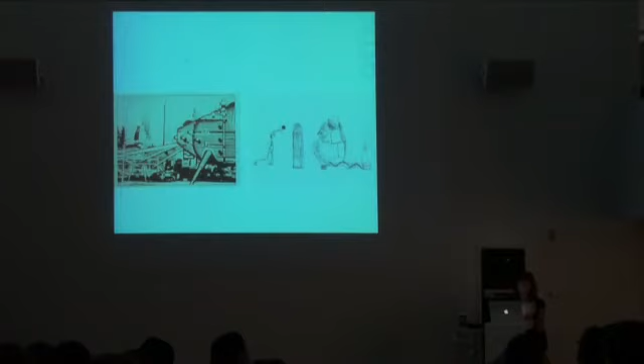So I'm showing you just a few images that I find inspirational, things that I look at outside of buildings—certainly Wally Byam's Airstream and the small, compact hotel rooms of Japan, making do with very little. The work of someone like Lucy Orta or Dré Wapenaar: these beautiful tent-like structures, very simple, elegant teardrops, kind of just hanging almost seamlessly.

And this image, which actually now seems very archaic to me, but was something that I started using in my lecture about 10 years ago, pretty much sums up my world, my office, my on-the-road experience—the laptop and the iPod are ideas that I think haven't quite been implemented into the architectural vocabulary.

Eventually, I feel that this Razorfish image is a quintessential image, in that everything will eventually be so small and so embedded that the idea of shelter might dissipate, or might be found in a completely different way.

New advancements in technologies found mainly in the automobile industry and the aerospace industry are starting to find themselves into the classroom or into production lines, but again, haven't quite made it that far.

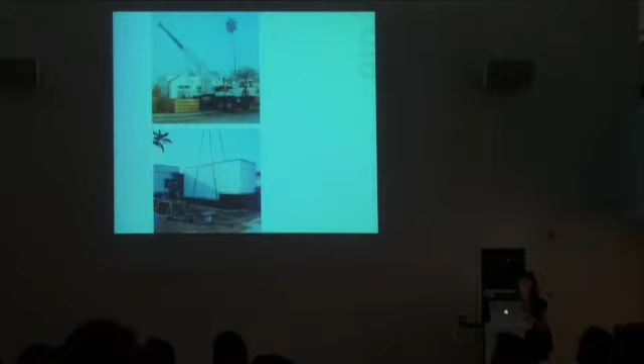So this is my house. I'm a big believer in trying out what I spout off about. This is an early morning in Venice, California. This is a crane that's trucked or craned over the top of the house—a truck trailer. Very inexpensive addition, I think I spent about $2,300 on this structure. I use this as a kind of ancillary space to the garden, an easy exchange of interior and exterior space.

One of my very first projects done with students, also at Woodbury, was the transformation of a truck into something we called the Eco Lab. This was an experiment for all of us in terms of compact spaciousness and what you could actually do with an 8-foot wide modular unit using found recycled elements, handcrafted, all built by the students, turned into a mobile classroom that teaches children about the life of a tree and moves throughout Hollywood. It was a very successful project for us because it led us to a lot of other ideas.

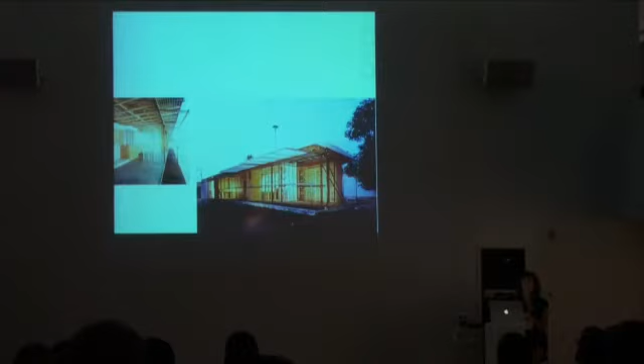This one in particular was another project done with a fellow architect in Santa Monica, Larry Scarpa, where we started to look at manufactured housing. We were given this old trailer, took it apart, and started to realize how shoddily crafted these things are—replacing some of the walls with steel and allowing it to be completely open to the elements. This is used by a group of people that train people in construction. So they're simple ideas, simple projects, but they got me started on my path and allowed me to understand more about what it was that I was grappling with.

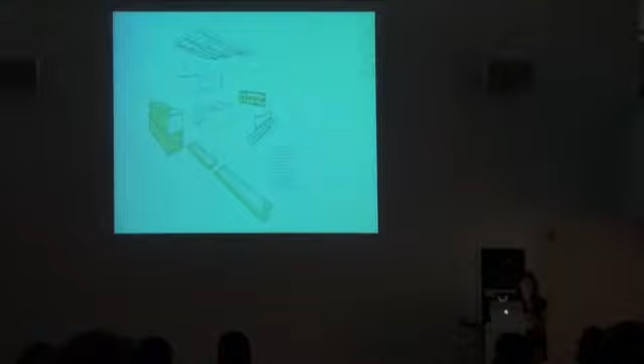The idea of shipping containers fits naturally into this envelope. I lived for about 5 years in downtown Los Angeles in a very industrial area called the Brewery, an artist loft complex. The fellow who owned that property was also a hoarder of materials and junk. He offered me the opportunity to create a house for him with all of the elements found on this property. So I picked out 4 shipping containers and 2 grain trailers and a bunch of other items, making a sort of modest structure on a fairly big piece of property in LA, about 10,000 square feet. So the containers really just acted as these buffers, as these walls.

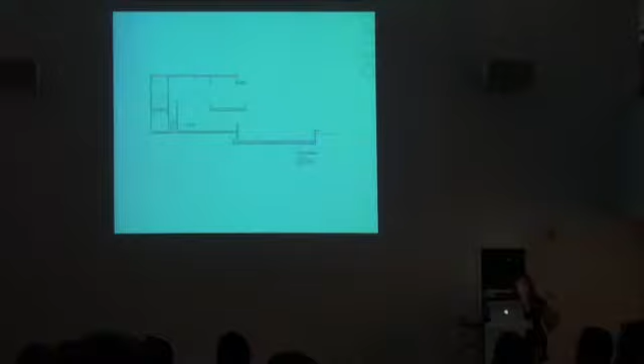And this is really just a house for one person, about 3,000 square feet. In section, you can see that the grain trailers became 2 koi fish ponds—one was on the inside, one was on the outside of the house—and sort of united the water feature between the two.

Here's the location. This is the 5 freeway running north and south. This is the Brewery complex—about 350 artists live and work, and manufacturers live and work in this area. Downtown's over here, and SciArc is kind of over here right now. He also, being a true Angelino, doesn't walk to work—so even though he lives here and his office is here, he drives. So it was really important for him to have the house nestled in the back of the property, which would give him that natural experience of walking across the property to his car.

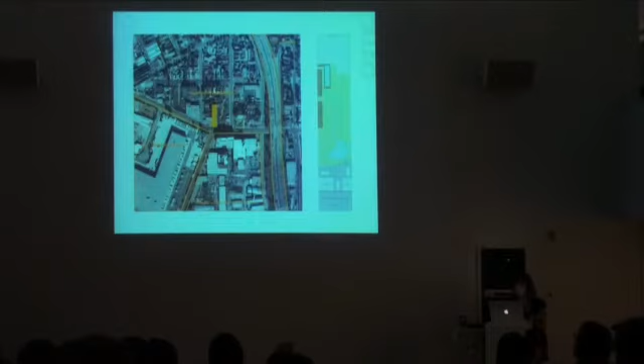So this is the site, and this is where the materials came from. The entire landscape was actually introduced as well, but because this is part of the alluvial plain of the Los Angeles River, once we removed the tarmac and concrete and planted, it was incredible what the wildlife did, almost instantaneously—the birds that come and the butterflies that migrate through. So the space is alive, it sort of breathes.

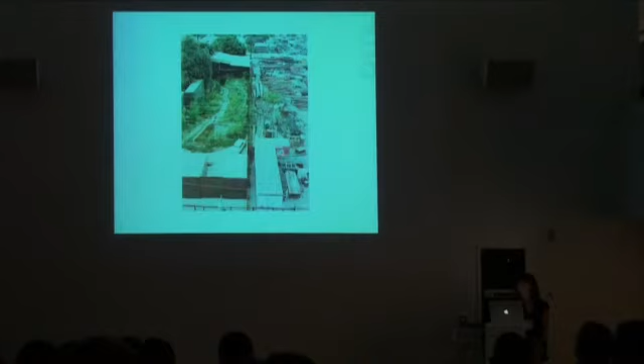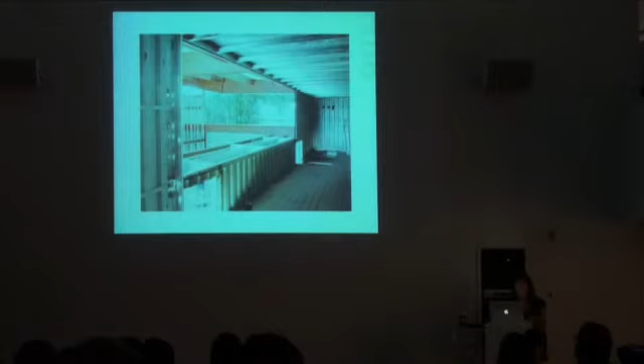There are 4 different kinds of containers. 2 are steel, 2 are aluminum. There was a lot of invention. This was probably the most collaborative project I've ever worked on for a client, because he was very involved in it.

His first house was completed with Michael Rotondi, and I think they took about 5 years to do that together. This house was completed in about 3 months, so it was a very different process, and we were both very much involved in it.

The house has a sort of natural breathing ability because of the way in which the windows are set, and you're able to move air through it passively. The roof is built up from a series of rigid insulation and decking, so that air will travel through this entire roof, and you hear it sometimes with the wind passing by.

There's probably a total of 5 people that constructed this house: steel, glass, drywall, and an artist. And here's the client. There was an interesting relationship between this fellow, David McCarskey, and the client, Richard Carlson, because they knew each other for so long, and everyone who worked on this project also lived within this complex. David McCarskey designed all of the furniture, and there was an artist who installed all of his artwork, so there was always a kind of knowing about what all of the elements would be in the end, even though we weren't really sure how they would fit together.

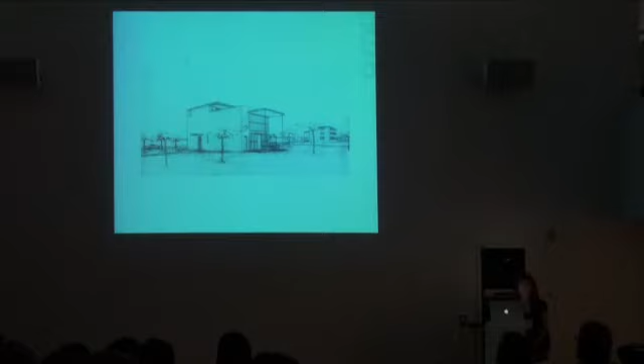So I can't say that I haven't looked at history. People that came before, predecessors, are important for all of us, I think, and it's important to know where you position yourself. From the 1920s, Corbusier was starting to think about prefabrication. Certainly Conrad Wachsmann and Walter Gropius were already way ahead of things in the late 40s.

This is from '46. This is something called the packaged house, where they were looking at panelized systems. They actually had a whole truck line that they invented that went along with that system, because it was done in meters—it was a metric system.

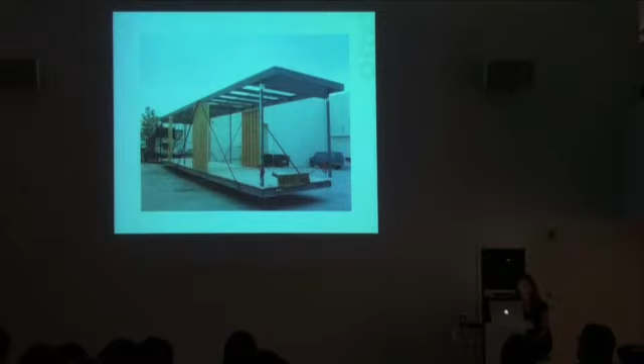It sits on its own set of axles and wheels. Those axles and wheels get popped off when they arrive on the site, but the entire building stays as one unit. The maximum width you can move a single unit down the road in California is about 16 feet, and you can go up to approximately 80 feet in length, with a height limit of about 15.6 feet.

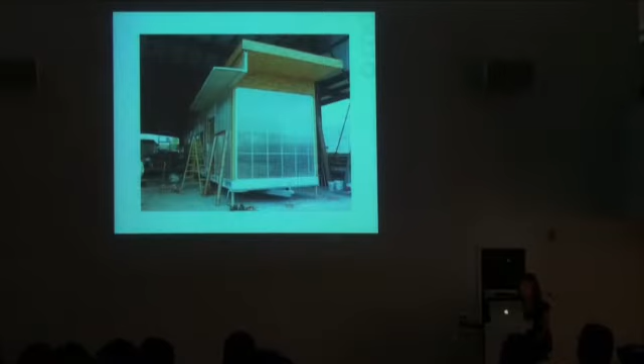So this little unit was an idea that I had, and I thought if I could just produce one thing, then I could satisfy my interests in this. I was able to cobble together a series of local fabricators, local business people that would contribute to that, from the flooring, which was bamboo and coconut palm flooring.

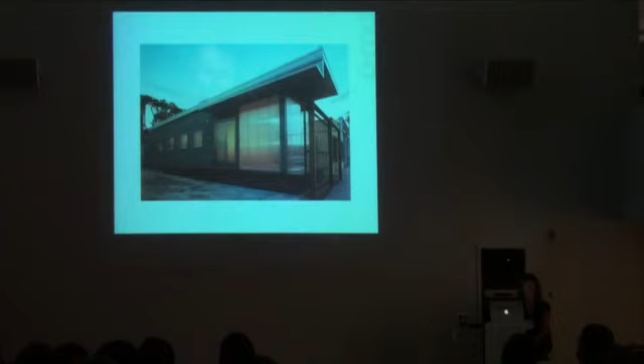There's a whole series of different technologies embedded within this house. I use this, it's right down the street from my office, to show people what the potential of just a single module or modular building might feel like. It's very spacious on the inside, very different in volume from the outside.

This is a polycarbonate front panel. It's a shed roof, so at its highest level it has an operable skylight, a very simple idea that allows it to be passively cooled. And then there are heating panels in the ceiling called people heaters that give it its heat in the winter.

From that project, clients started walking in the door, and we started to explore a variety of different building types, still on smaller lots. This is a lot in Santa Monica, very small, about 24 feet wide by about 125 feet long. So the entire house is a 16-foot wide building, made up of 4 modules.

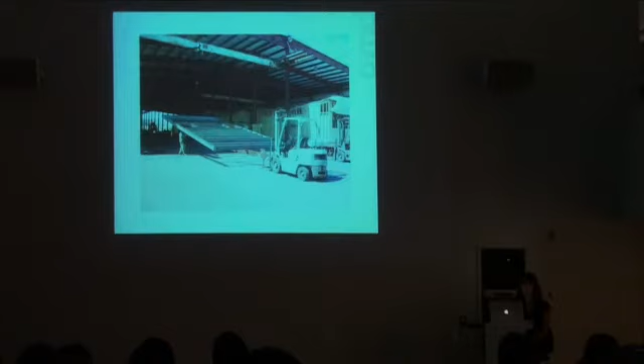And here it is out in the factory. This was probably the greatest challenge for me. It's easy to make a rendering; it's hard to find someone who would build it. What I find in this industry is it's very set in its ways, and people are not very interested in retooling. So you have to be a very good spokesperson and be able to convince someone of your vision.

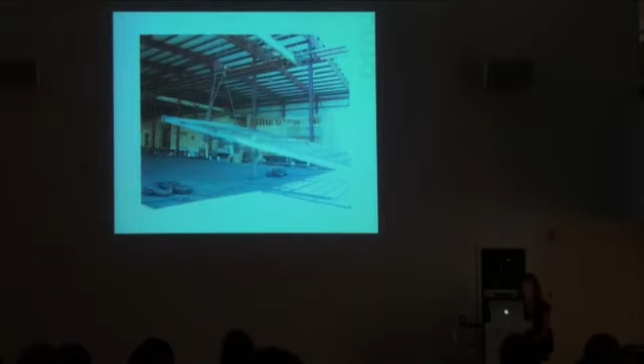Eventually this factory went along and has been my fabricator since. We've done about a dozen houses together and a couple of schools.

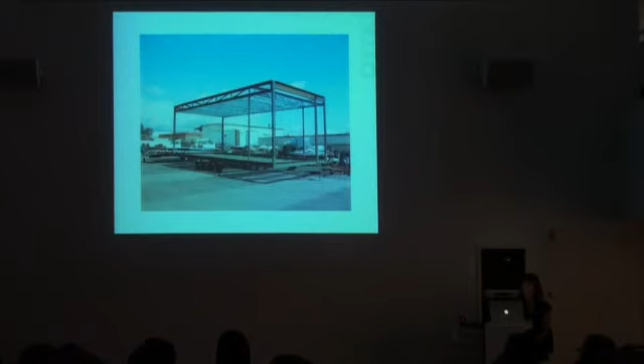So the modules, as you can see, are kind of being pumped out. Everything is built at one level, which allows for a lot more precision and craft in the field or at the factory. There's a lot less waste in this method of construction, about 30% less, because a lot of that material gets recycled and put back into the building.

Small things like the workers don't have to drive around the city all day, they're just going to one location. Things are built in incredibly short periods of time. Within a week, the entire structural system of these buildings is complete, all four of them. Within 3 months, we're ready to truck out our buildings.

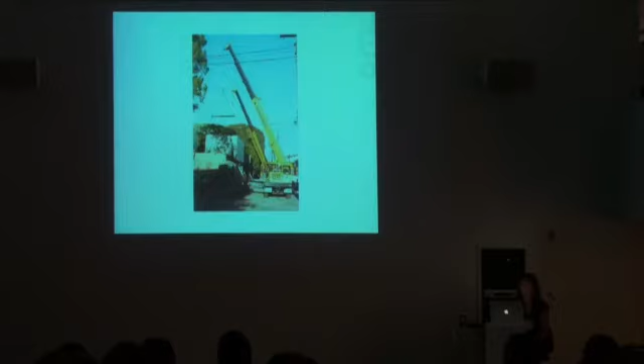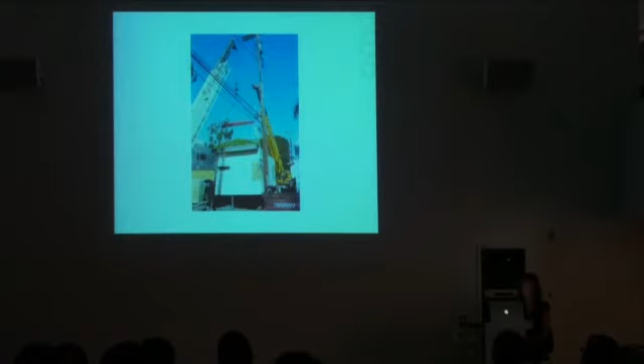Depending on the scale of the building, this is a very tight site, so there are 2 cranes operating. I'd say the heroes behind a lot of this work are the crane operators. It's amazing to watch the choreography between the power lines and the cranes. The modules weigh—this one was 11 tons, I believe, just for one. It's like a barn raising, but you feel every twinge in your stomach.

So depending on what we are doing for a finish or an interior, that will determine how much is done in the factory. This one has a smooth trowel stucco at its base, and that was done on site, while everything else was pretty much completed in the factory.

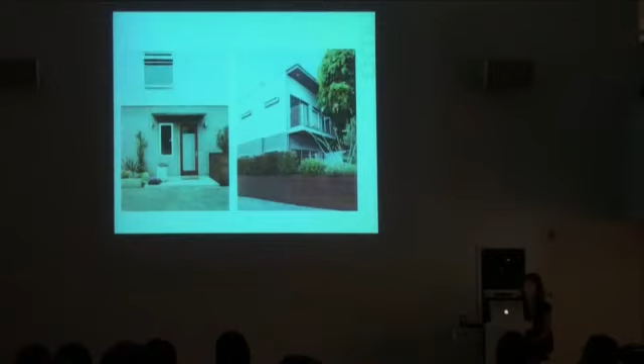This is about a 2,200 square foot building with very simple fixtures—this is just an IKEA kitchen. The cost of this building was $240 a square foot, which did not include the land.

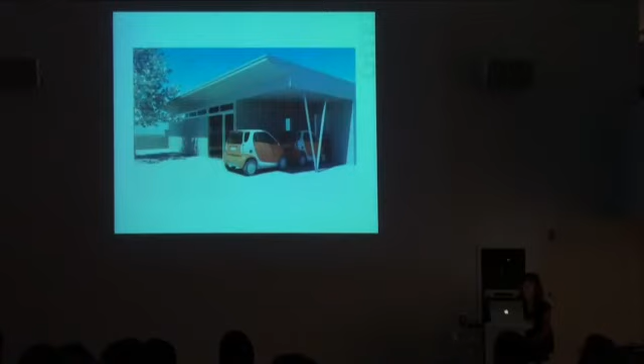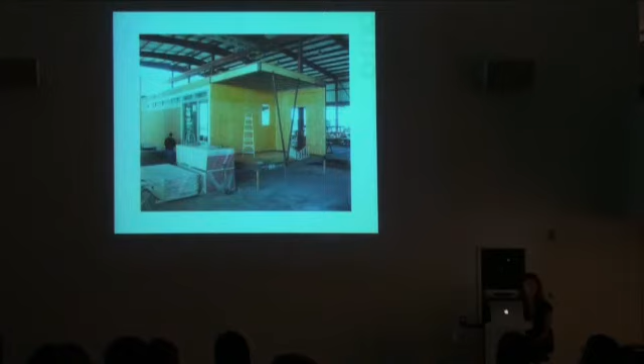For me, the most exciting moment is the factory moment, bringing the client to the factory, because it's rare work where you as the architect get to expose your idea fully to a client prior to the end of construction. They walk in and see all of these large Lego pieces, and they have to imagine them coming together. But it becomes the basis for trust in the relationship once they actually see the real units.

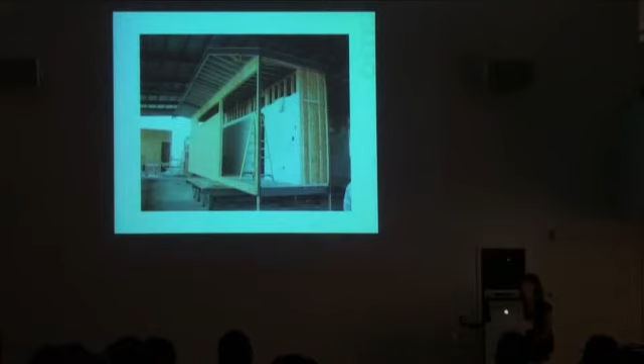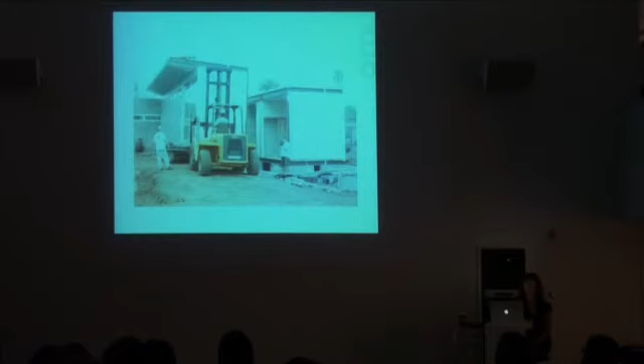This was a house that was an addition to an existing structure. It was also built from 4 modules, but it's a single level. I was very interested in creating a private kind of interior courtyard. This image always makes me think of a Gordon Matta-Clark image, where instead of taking the building apart, we're trying to pull it together. It's a remarkable experience.

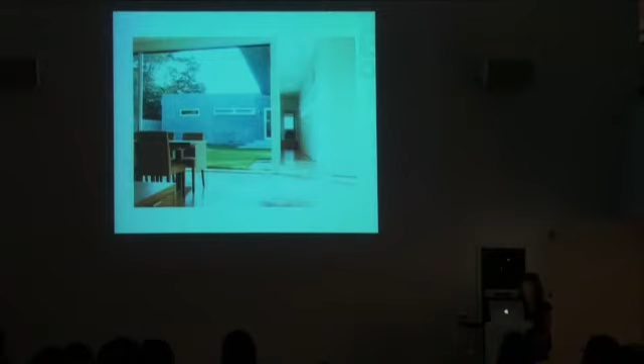I've also been working quite a bit with SIP panels, structurally insulated panels, which I think are terrific. They come pre-cut, pre-channeled. There's also a whole system now made of Agriboard, with a variety of different infills—some soy products. This one is styrofoam and an OSB board.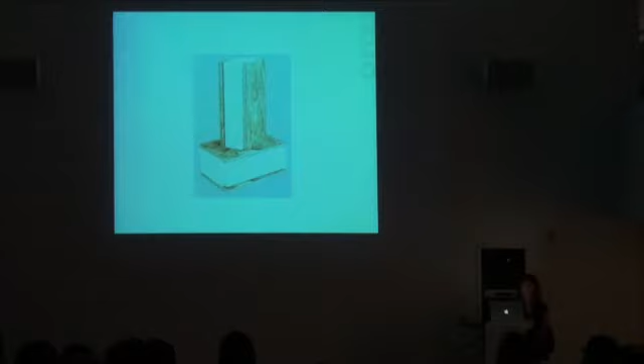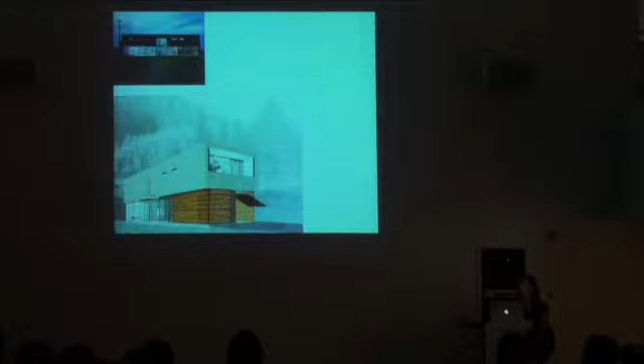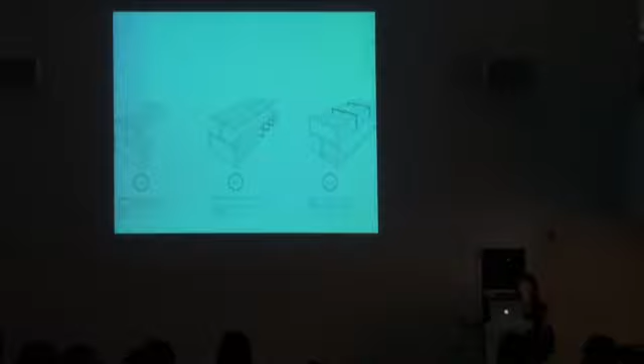I first designed this for an invited competition for Dwell magazine, and we called it the Swell House. I was thinking about things that would be smaller, bite-sized units or chunks that I could take apart and deliver to the site in different ways, because some sites are incredibly challenging. A simpler system with fewer pieces would be a smoother operation. Then you can configure them in a whole variety of ways, and presto, you have your house.

This was the first client who saw that idea and hired us to do a house for him in Venice. He's a music producer, so part of this project is a recording studio. What's fascinating about the SIP panels is the acoustical value, not just the thermal value—it's incredibly tight, incredibly efficient.

These SIP panels in particular came from Phoenix, and within about a 3-day period, it was installed. They're easy to maneuver, so you can see it's just 2 or 3 people on the site, able to use it without a crane, which was pretty important to us at that time.

This is the house, really, down the street from my office. I find that if I have clients in my neighborhood, I don't have to drive, which I appreciate.

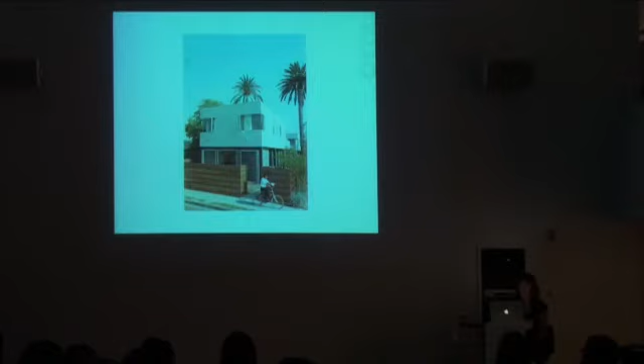This was pre-landscape. One client once told me that the sooner you put the plants in the ground, the quicker they're working for you, because as you're sleeping, they're working. So that's something to keep in mind when your clients are dragging their feet about landscape.

This is a concrete radiant floor, clean lines. He's a New Yorker, very interested in a modernist feel.

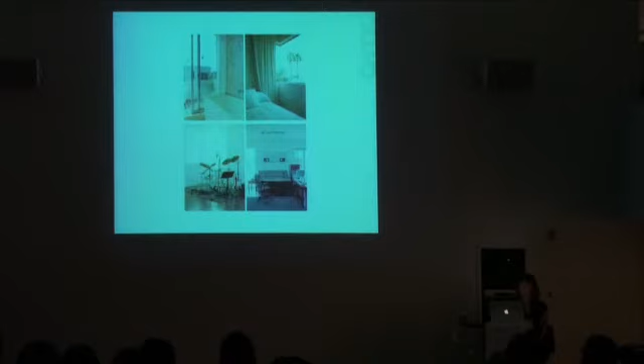This was a hybrid project between those two systems. It's a recent project I built with students at Taliesin—or they built, and I was helping them. We were looking at prefabricated options, trying to come up with a new system the apprentices could collaborate on. They all build their own dwellings out in the desert, but they hadn't done anything for the public, really, since Frank Lloyd Wright's death. They hadn't built anything new.

So this was a very controversial project for Taliesin. This is in Phoenix, but it worked out extraordinarily well. The students, I think, are magnificent. They're very inspired, hard-working.

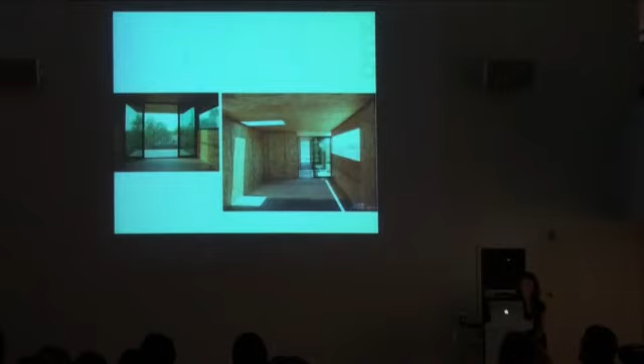This was probably last March, I think, out in Phoenix. Everything built off-site, and a very simple unit, 12 feet wide by about 50 feet long, all built from SIPs with that same steel chassis, and elevated a little bit off the ground, sitting over this arroyo.

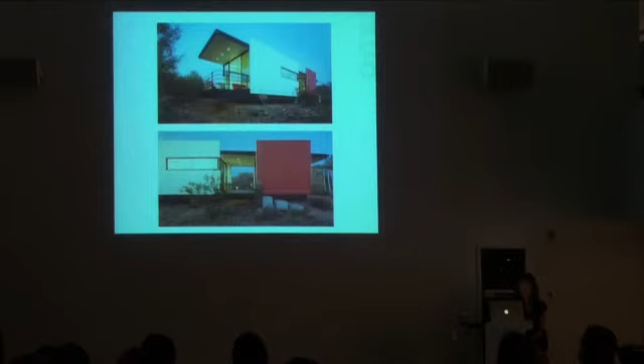This building's completely self-sufficient, powered by its own grid, and it's used as a guest residence for visiting scholars. And it's become part of the tour, which is pretty interesting as well. It also was a way for the students to explore a lot of landscape issues they were interested in, between gray water systems and water evaporation and collection from the desert.

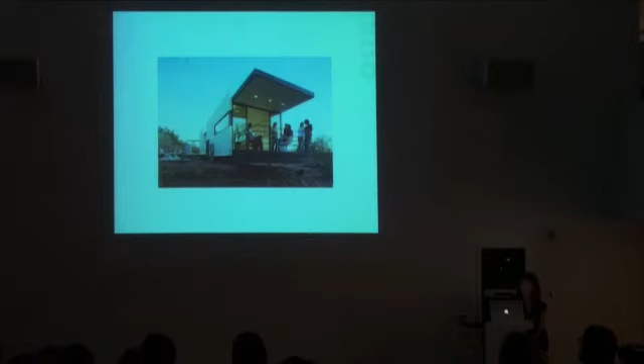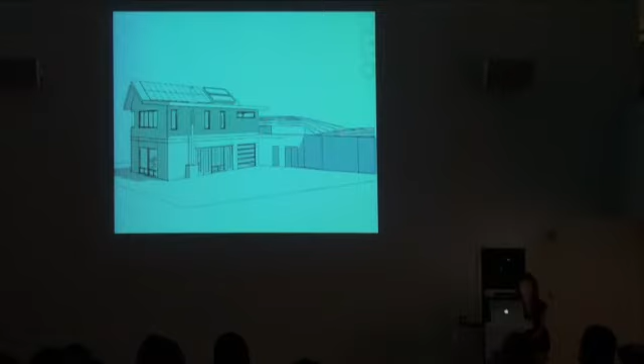And then this last project of this type is a project we just started construction on in Big Sur. A very interesting client, a woman who owns quite a bit of property and is interested in how green green can be. So this project is completely off the grid. It has a backup system of a propane tank, but it will only be needed 30 days out of the year. So we spent considerable amounts of time with a lot of consultants coming up with the best design solution for this particular site.

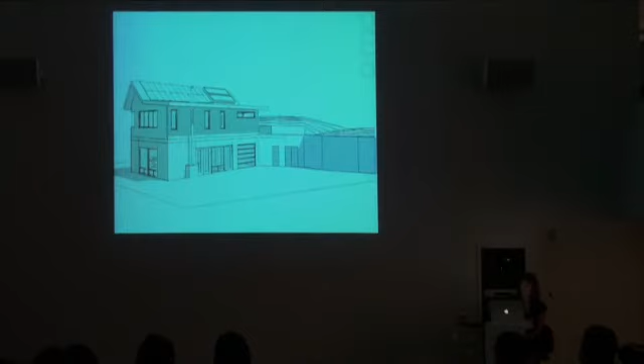What's interesting in a project like that is that you have to know every single item that will ever be powered in the house, down to an electric toothbrush or your computer system, because it's all calculated sort of backwards. The reason this house is designed this way is because the site is so challenging and there is no power on the site. So everything has to be brought into its location. It's a very small house, but has had more attention given to it than I think anything else I've ever worked on. So we'll see that completed by April.

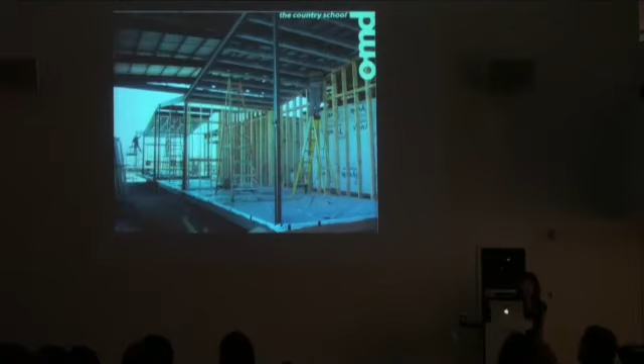I've done a few things with schools, which I think brings me back to where I started from, which is really my basis, my educational basis of teaching, something I really believe in quite strongly. Same factory, and it's interesting because the same factory that builds my houses builds the schools as well.

This was awarded as the first green prefabricated school in Los Angeles, which for me is not an extraordinary project, it's a very simple, modest project. But what it did is offer the students natural light and a lot of ventilation, and a strong tie back into the grounds, into nature. So I worked very closely with a good friend of mine who's a landscape architect to create butterfly gardens and edible gardens. And the life of the school actually happens quite a bit outside, amphitheaters and such.

In some ways, I think I'm most proud of this project because of the users. It's very limiting in some ways to do private residential buildings, and when you're working at a bigger scale, it makes you feel better.

Some of the materials, this is a biofiber, made from recycled sunflower seeds, and the floor is a rubber and cork, which comes in different colors. I was very interested in the way that light and color would affect the life of a student in this classroom.

I still think a lot about the future. I get asked quite a bit about my feelings—what will the world be like 100 years from now? We just finished a competition for the city of Los Angeles for 2106, or 2100, whatever year it was. And I think about materials. I think about the way in which we may inhabit the planet.

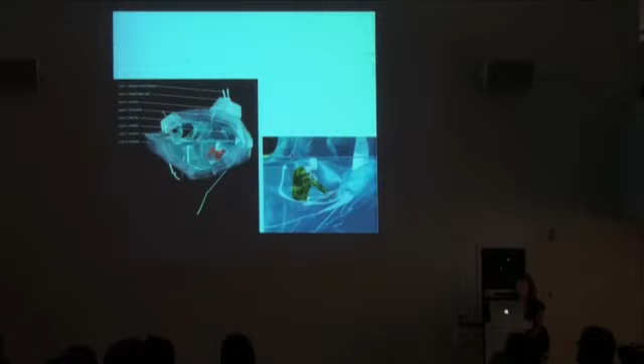This project is called the Hydra House, where these Hydra units and cells start to interact with each other, and there are lots of layers of different materials that work off of each other, from aerogels to technogels and luminex and hybrid solar cells, and even the idea of creating energy from salt, which is something we're starting to see more and more. I like to think about dwelling in a very... without gravity, without anything that sort of holds me back, because I think it keeps you fresh.

And then I also, this was part of our competition, thinking about water as being this obviously precious resource, and that water will eventually become so precious that it will become the oil for your generation.

The future of mobile architecture is unfolding rapidly. As our buildings become more portable and adaptable, they become more useful. Before long, we will shed the bulk and excess of static environments as we look to Generation Mobile for its long-term solutions for the uprooting of today's built structures.

It is this recognition of the fluidity of circumstances, the mobility of demographics and information, and an increasing capacity for architecture to respond to fluidity, whether it's through low-tech ad hoc vernaculars or through high-tech kinetics and embedded computation. From solo dwelling to eco-friendly housing, I see opportunities for sustainable design ventures that can be employed here and now.